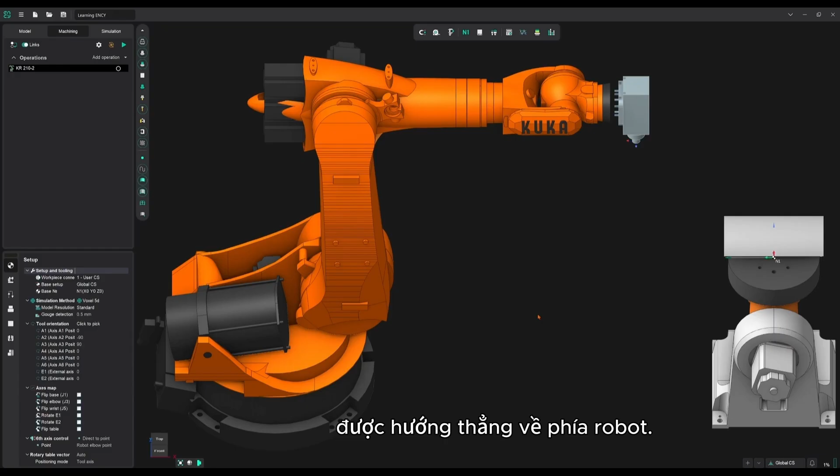Continuing to use the model we've constructed over the previous videos, we first want to orient the model for the best access to the finished surface. In doing so, we must be mindful of the orientations available from the turntable. I'm going to reorient the second turntable axis by 90 degrees, so the long edge of the workpiece is presented towards the robot. To do this, we go to axis E2 in the Setup tab, and where it says 0, we replace that with 90.

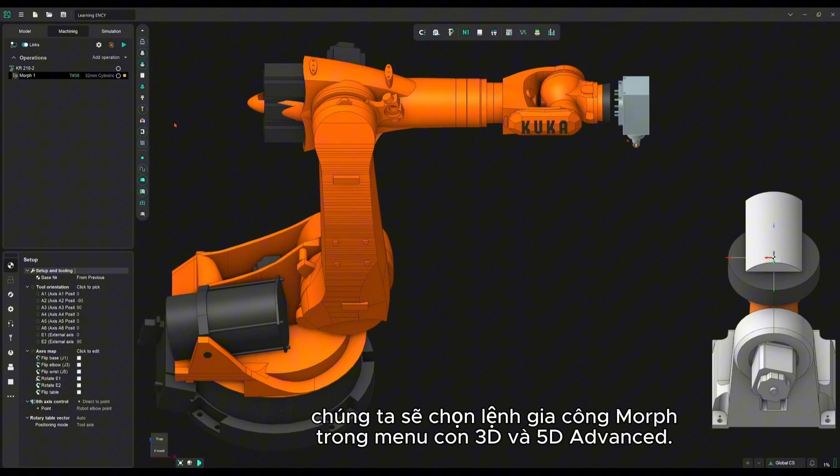Now we want to assign an operation to start the toolpath process. In the Operations menu, on the top right corner of the left-hand tab, we select a Morph operation, under the 3D and 5D Advanced submenu. We're going to choose a spherical or ball nose mill for this. Let's go for a 30mm one, so we can see the toolpath clearly. We're also going to change the length of this mill, bumping it up to 150mm, just to be certain we won't get any collisions.

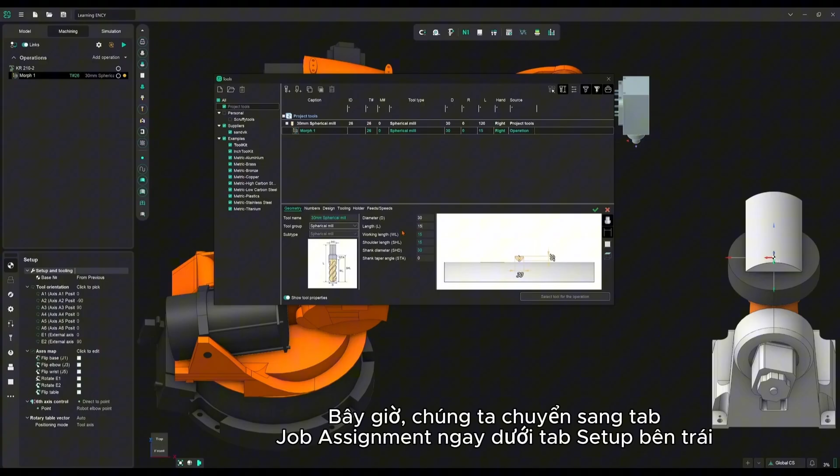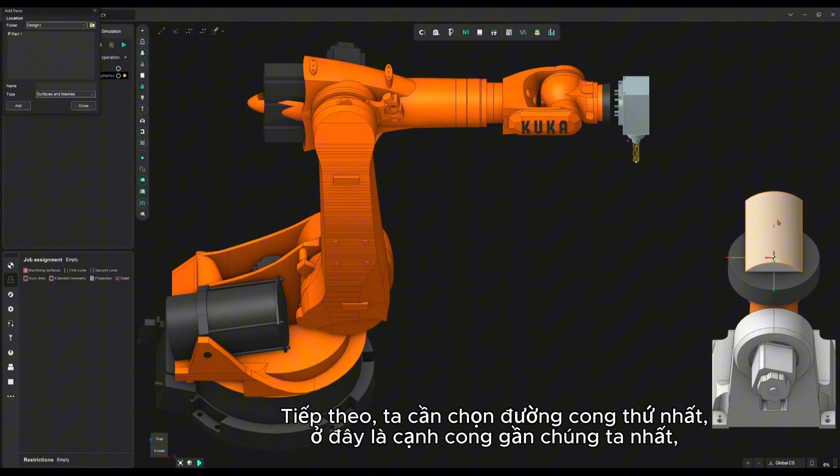Now we're going to move on to the Job Assignment tab, just under the Setup tab on the left, and define the job zone we want the robot to work on. First, we make sure face selection is turned on, along with edge selection. Then we click on Machining Surfaces on the left-hand side of the screen and select the top surface of our part. Once that's done, we choose the first curve, in this case the curved edge nearest to us, and do the same for the second curve. This is a requirement specific to the Morph toolpath, since it's designed around giving the cleanest transition surface between the two defined curves.

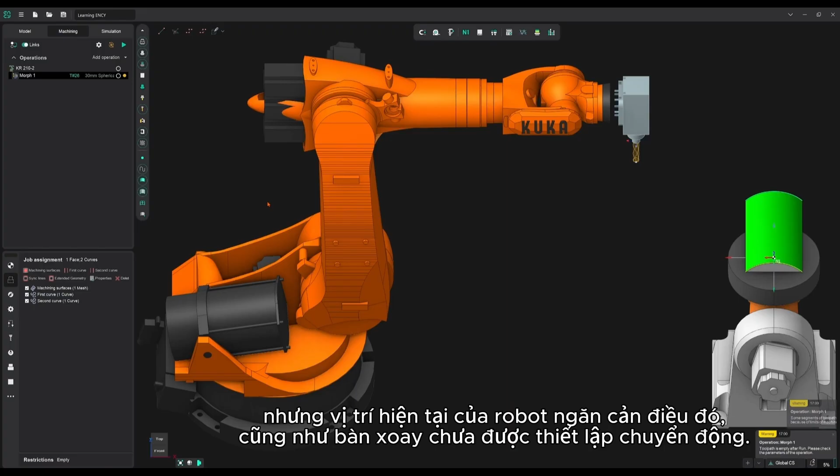Now that we've defined that, we can click Run to calculate the path. However, we can see that nothing much has happened. Obviously, this isn't the result we want. The reason is that the orientation of the robot relative to the rotary table needs to be able to articulate cleanly across the curve, and the current position of the robot precludes that, as does the fact that the turntable is also not set to move.

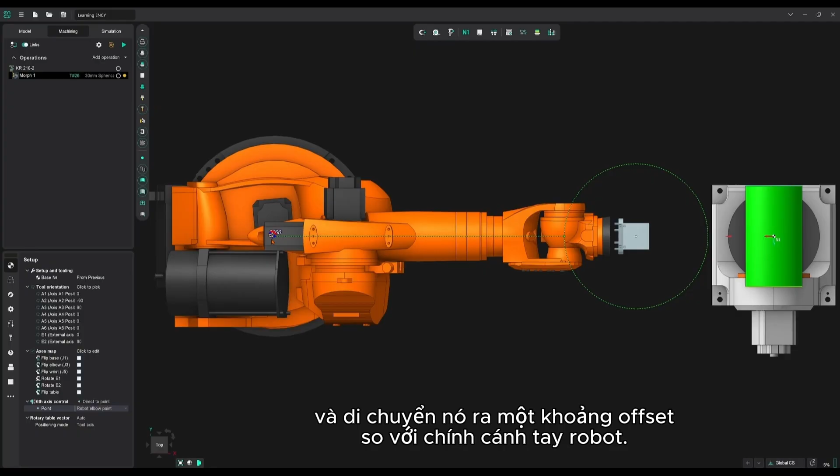The easiest fix for this, and a very handy feature of ENCY's workflow, is to adjust the 6th axis control. If we click on this, we can adjust the point relative to the robot that the 6th axis is articulated around. When the option is selected, an indicator of the robot's articulation range is shown. We want to change this so the arm has a freer range of motion. To achieve this, we grab the widget in the robot's elbow joint and bring it around so it's offset from the robot arm itself. This adjusts the orientation of the tool axis around its relative Z, so you can see the wrist joint starting to articulate, meaning it can now move around the curved surface in front of it.

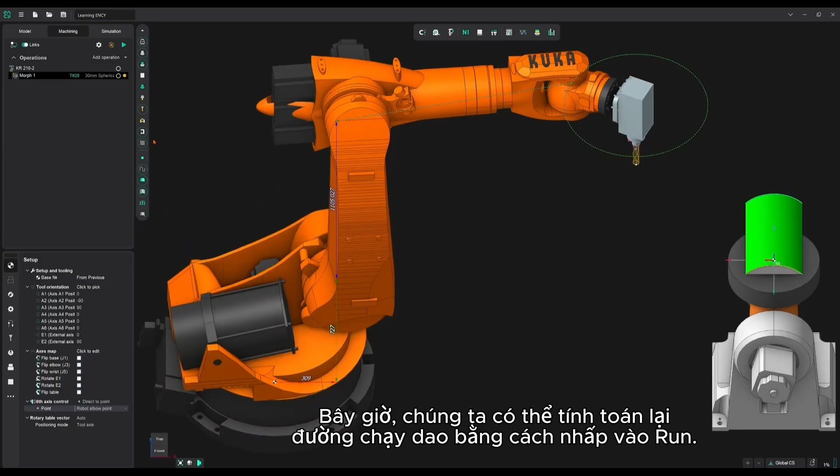Now we can recalculate the toolpath by clicking Run. You can see we've already got a result. We're not done with this, however. Let's adjust the tool step over to 60% from its original 20%, so we have a shorter overall toolpath and get a clearer picture of what's going on.

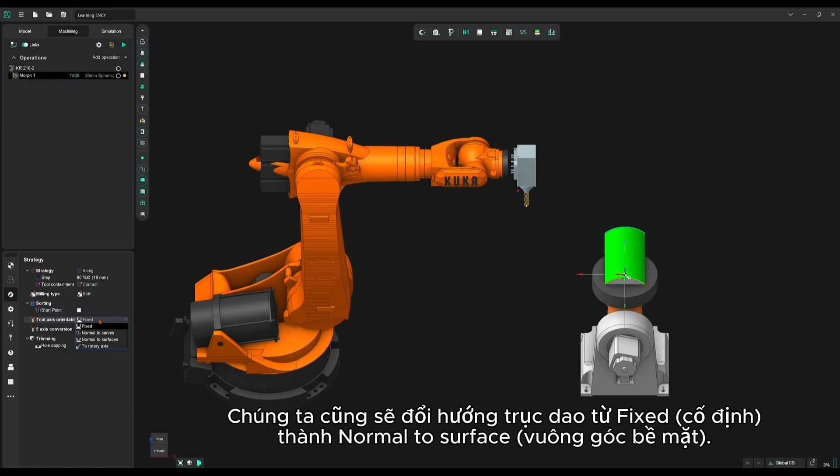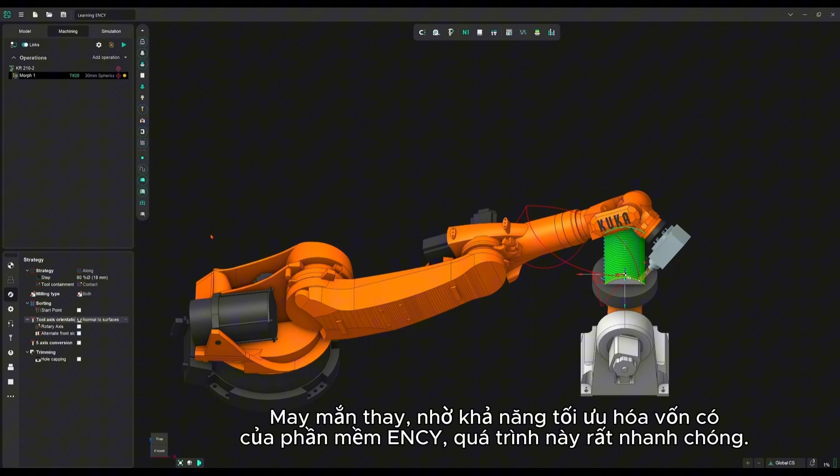This can be done in the Strategy tab. We're also going to change the tool axis orientation, from fixed to normal to surface. We might as well make full use of the robot's range of motion. With this setting, we'll get a better surface finish when using a Morph operation, since tool perpendicularity will minimize chatter and make fullest use of the tip geometry. For every change like this, we have to rerun the toolpath calculation. Fortunately, due to ENCY's innate optimizations, it's quick and painless. It's usually worth clicking Reset to clear all previously shown toolpath actions, keeping the display free of artifacts.

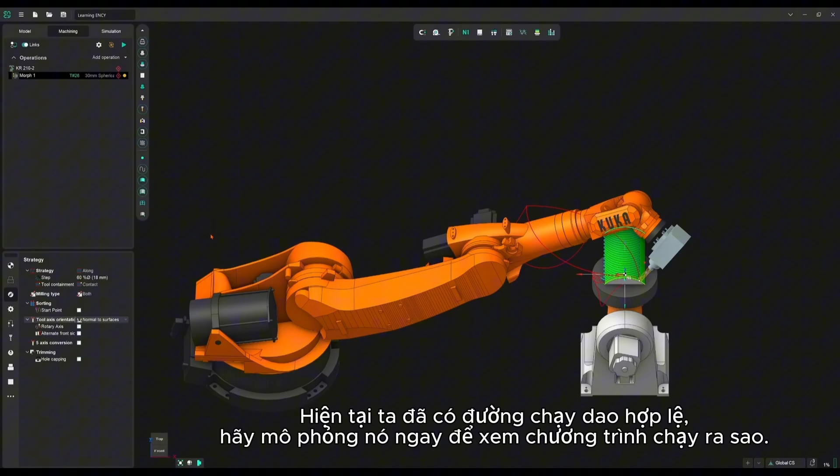So now we have a valid and viable toolpath. Let's simulate it to see how the program works. Click on the Simulation tab in the upper left of the screen, and click the play icon to start. The slider beneath the play and stop buttons controls simulation speed, so you can fast forward through parts you're confident about or slow down to double check toolpath viability. However, watching the simulation play out, we can see the turntable isn't moving at all, and the robot has to reach a long way to achieve the perpendicularity from the finished surface that we wanted. While the toolpath nominally works, it's far from perfect.

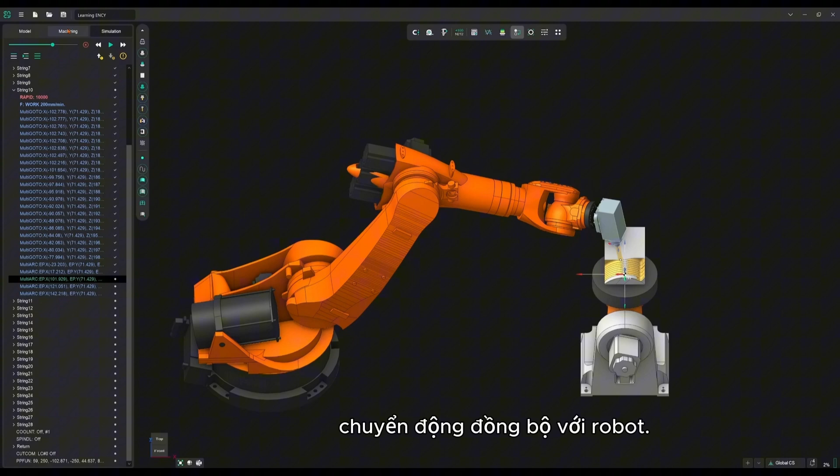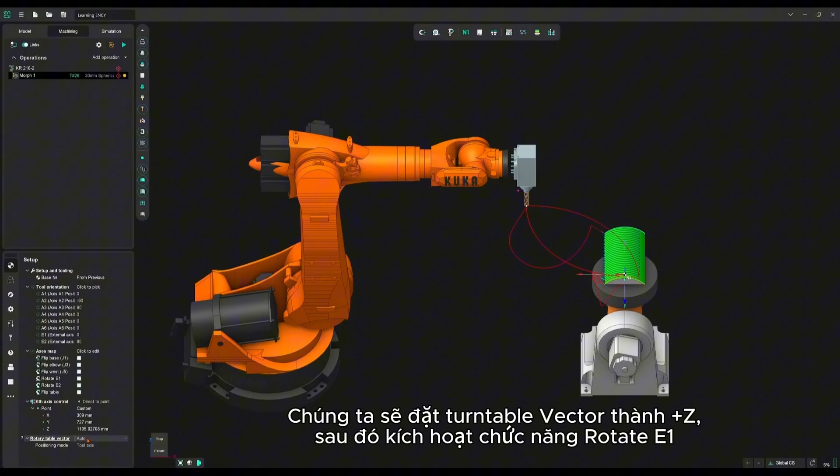So let's look at making the turntable move in sync with the robot. Going back to the Machining tab and the 6th axis control subsection, there's a control called Rotary Table Vector. This is typically set to auto, which isn't doing much good right now. We have the option to define the position of the turntable relative to the tool axis, as indicated in the control below. We're going to set the turntable vector to positive Z, and then enable the Rotate E1 function just above this setting. This means the first axis of the turntable will be able to move and should keep with the preferred orientation we've just defined.

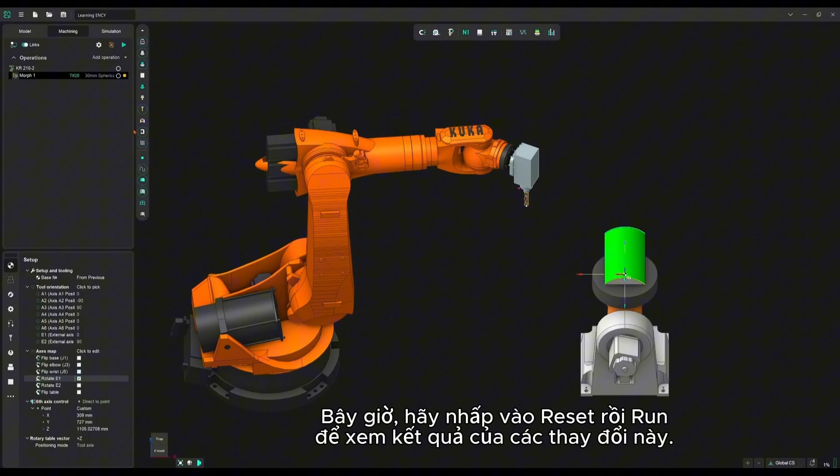Now we're going to click Reset, then Run, to see the outcome of these changes. If we move over to the simulation environment, click the Reset Workpiece button, then press play, we should see the turntable and the arm moving in sync with each other to machine the workpiece, relieving all of the reach issues.

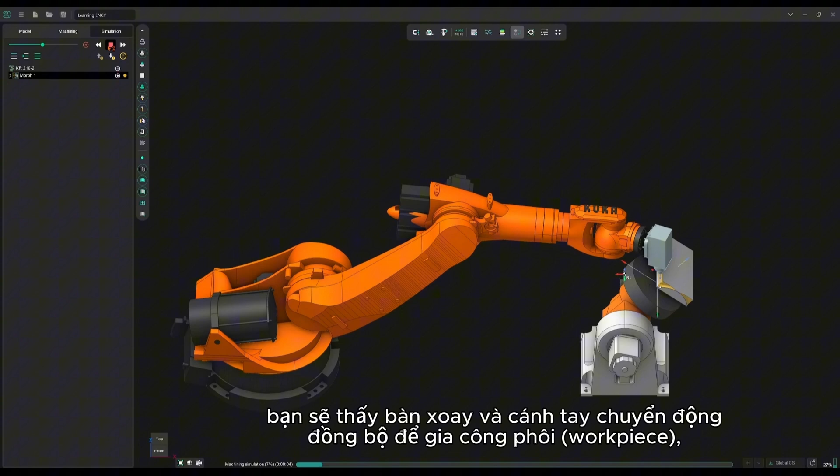This concludes this video. In the next video, we'll be covering the use of the axis map, or to give it its full name, the Redundant Axes Mapping Tool. This remarkably powerful tool gives us the ability to optimize and improve toolpaths around almost any stumbling block in a program.